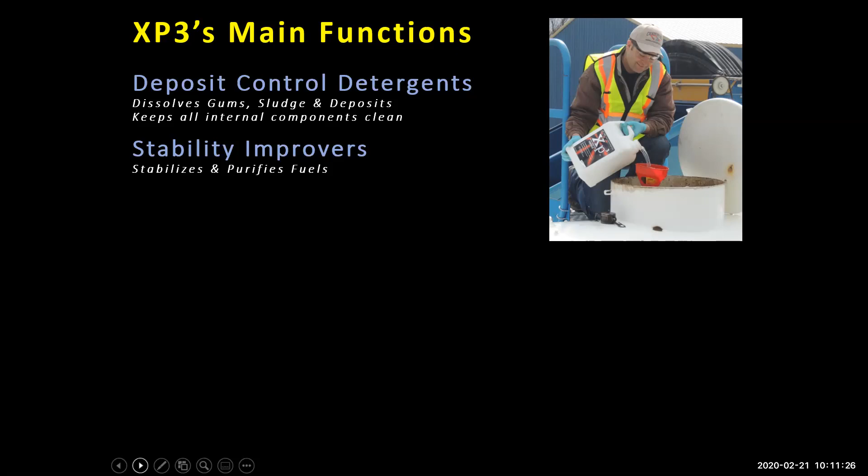So the main functions of what XP3 does: it's got deposit control detergents that help keep the internal components of your engine clean, as it was intended when it came out brand new from the manufacturer. It has stability improvers, which stabilize and purify fuels. Combustion improvers, so a more complete burn of the fuel equals more power and less unburned hydrocarbons, less emissions. It's got lubricity improvers, which lubricate and protect the entire fuel system.

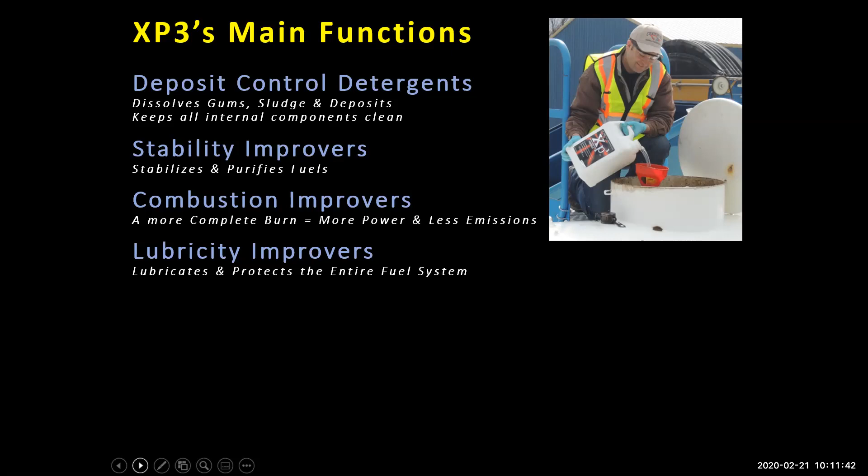It's got anti-gel cold flow improvers to maintain cold weather operability. Very important, especially in some Canadian winters that we get lots of weather.

Water dispersants - this is probably the most important feature of any additive. With the biofuel content today, the bio in diesel and the ethanol in gasoline, those compounds are hygroscopic, which means that when it comes out of the pump, yes, it might meet ASTM specification as spec fuel. But if you let it sit in a tank exposed to hot, cold, or humidity, the bio content in that fuel absorbs moisture and increases the parts per million of water in that fuel, which can then cause multiple other problems related to water, moisture, condensation, microbial infestation.

It's really bad. Water and fuel is something that fleets have to manage, and if they don't, they can come across problems that they don't want.

And again, if you're talking about fleets, everybody's looking for a positive ROI. This is a positive ROI product. For an input cost of 3 to 4 cents per liter to treat, you're gaining 4 to 8% better fuel economy right off the top from tank one, but you're also getting increased lubricity for your injector pumps, and all of the other functions that are not specifically directly related to a return on fuel economy, but very important in the operation of equipment in large fleets.

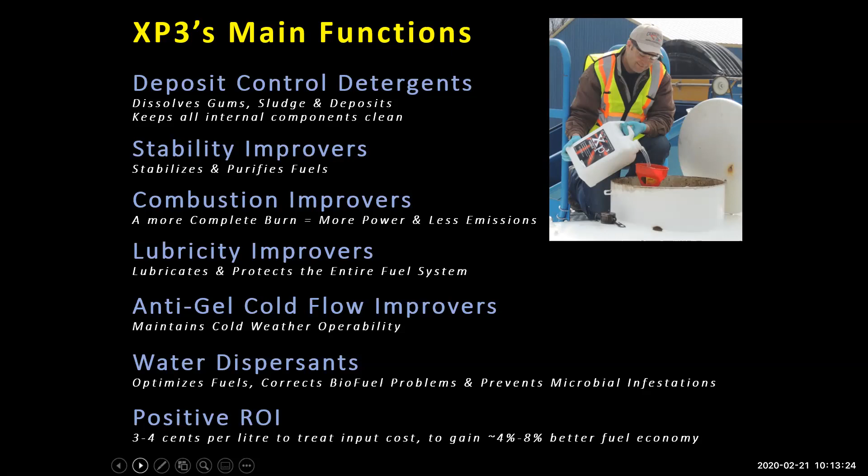XP Lab has been serving industrial, recreational, and commercial markets for over 30 years. Typically, what we've seen in Canada, the off-road heavy equipment, over-the-road, Class 7, Class 8 trucks, agriculture - those are the areas where we see the biggest volume and the biggest benefits.

But if you look at small engine power sports on the gas side, we've kind of gotten a cult-like following with the snowmobile, ATV, motorcycle, small engine.

And the person in charge of that association went to the extent of testing XP3 in a spectrometer to see if it shows up as a banned substance for racing, and it does not.

So if you know anybody in the racing world - motocross, snowcross, dirt track racing - if they want to get an advantage from a fuel standpoint, and it's not illegal to use, and it does not show up on a spectrometer, XP3 might be the ticket for them to get that extra edge.

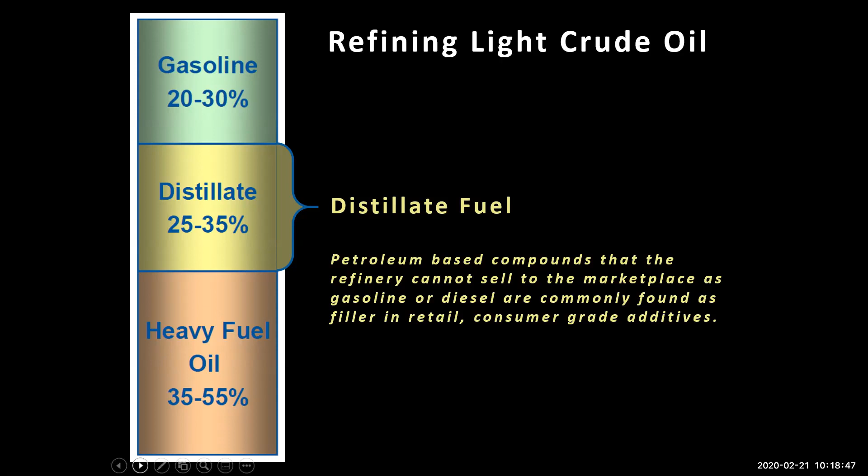But mainly what happens with retail grade additives is that they use that middle distillate as filler, which is not what you'd want because it's not meant to be burnt as gasoline or diesel, but it'll still kind of burn. So it's very important for consumers to check the MSD sheet. If the majority of the compounds are a filler or a petroleum distillate, then they know they're dealing with a consumer grade product, not an industrial strength, purely concentrated product.

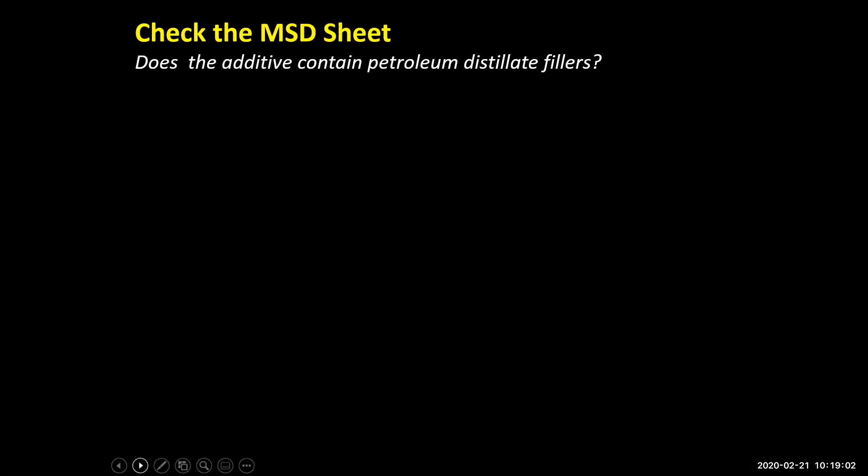So there are 6 different ways to help determine what an additive can actually do, no matter what it is. The first one you want to check is the MSD sheet - does it contain a petroleum distillate filler?

Here's the MSD sheet from a product called Howes. The first and third ingredients are petroleum distillates. The active ingredients in that product are ingredient number 2 and 4, and that's how they're able to get some anti-gel properties out of those extra ingredients. But if they were to sell a purely concentrated, industrial version of their product, that massive jug you see at the truck stops would actually be a little vial - 40 to 70% filler and only 1 to 5% active ingredients.

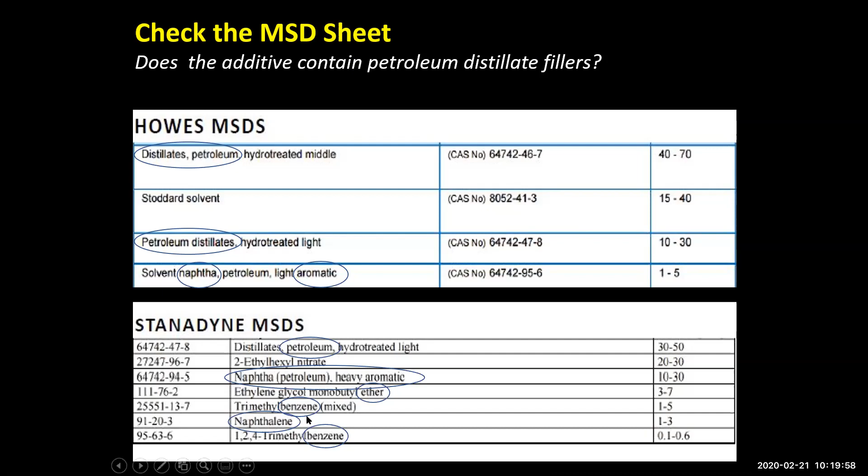Same thing here with Stanadyne, another retail grade additive. The majority of the first ingredient is petroleum, then the third ingredient is petroleum as well, plus other fillers. They also have ether in that product, as you can see on the 4th line.

Any questions, Trevor, on this so far? No, okay, we're doing good. Okay, I'll keep rolling here.

The second test is a test for carbon detergency value. You want an additive that has the ability to break down carbon, soot, and deposits in your engine. What you see here in the image is the bottom view of a pop can. On the bottom of the pop can there is carbon-based ink. If an additive has a high detergency value, it will break down the ink; if it doesn't, it won't. Very simple test to do.

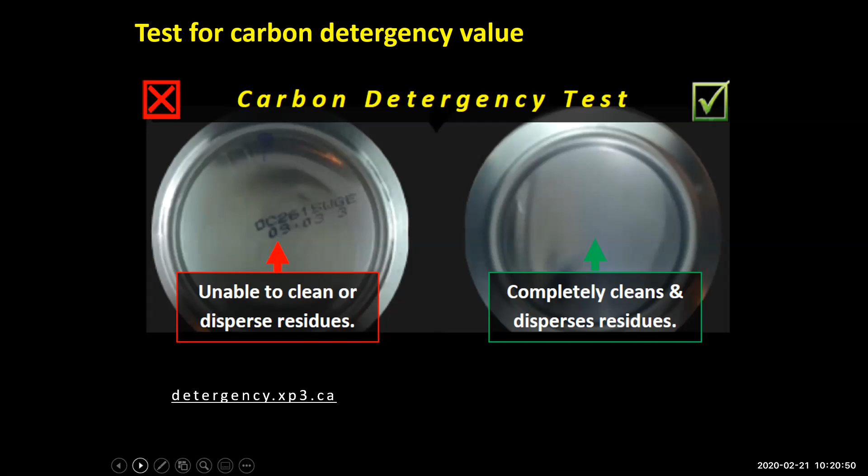The next test is combustion efficiency and particulate matter. From the same can, you take a torch and light the additive on fire. If it has a high combustion value, it'll burn clean and stable. If not, it'll burn darker, unstable, and dirty. Some of the worst retail grade additives will actually emit particulate matter, which is a major problem for tier 4 emission controlled engines with diesel particulate filters and DEF fluid. If you're adding something to your fuel that makes it burn worse, that's going to have a negative impact on your post-combustion stream emission equipment.

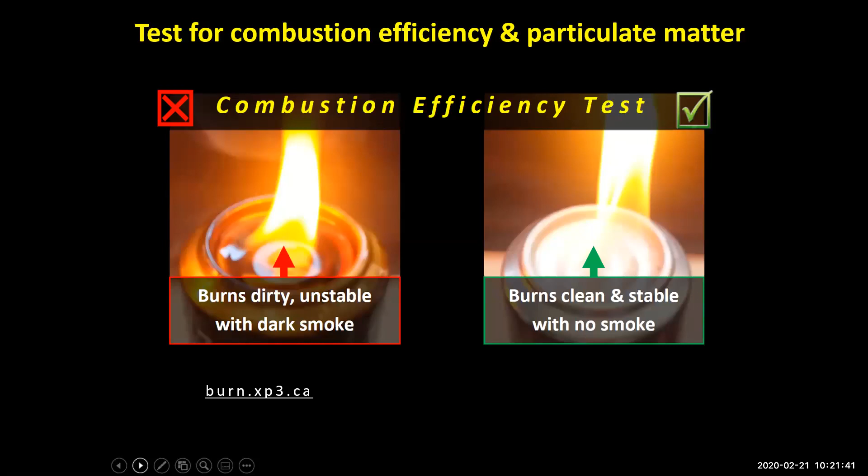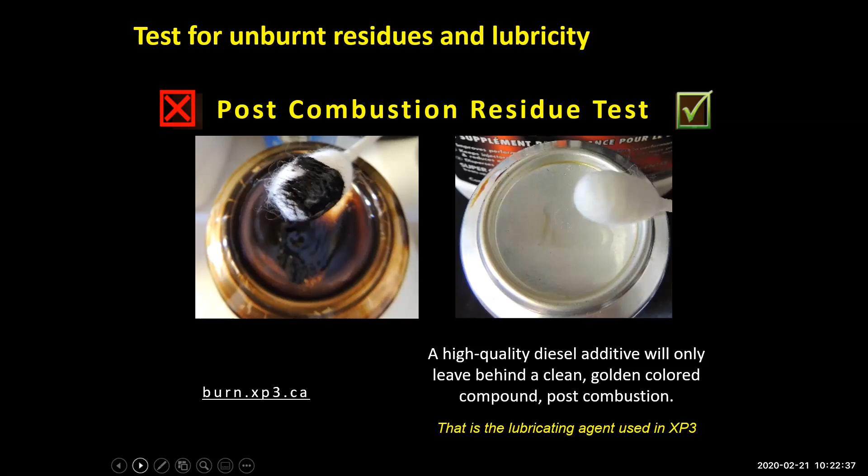Here's another test that's probably the most critical one. How does the additive behave with water and moisture? You simply put the additive - you don't need test tubes to do this. You can do it in a clear cup, or even those little clear shooter cups from the dollar store. Put a couple of drops of water in the additive you're validating or testing. If the additive has the ability to control water and moisture, you'll be able to see it break down. If it doesn't, it won't.

The second thing to know in this test is if the additive is able to break it down, you want to double check the MSDS sheet to make sure the product does not contain any alcohol. Alcohol would give the appearance of doing something with water, but because alcohol is volatile, as it evaporates, the function it gave initially will be removed, and then the water will fall back down at the bottom of the tank out of suspension.

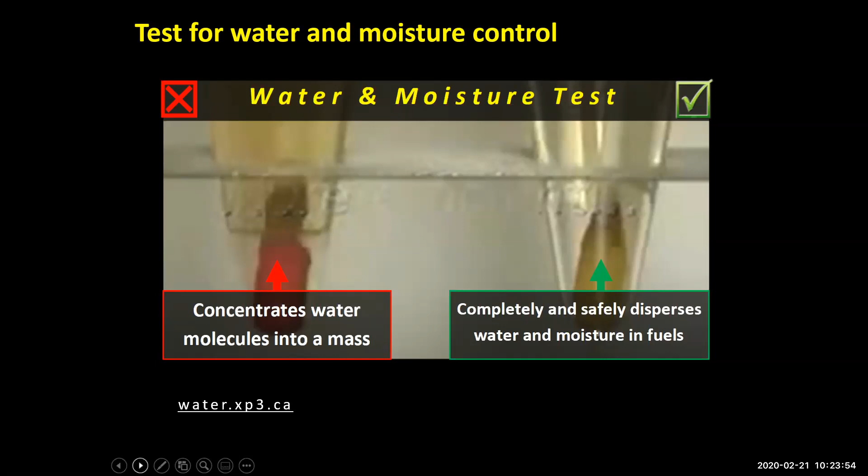This test needs to be done in a laboratory environment because it requires hydrochloric acid. It's a test to see how well an additive can stabilize fuel - literally an acid test on the ability to restore broken down and degraded fuel. You need glass test tubes. Fill it half with diesel, and put in 2 drops of hydrochloric acid. The hydrochloric acid will simulate the breaking down, phase separation of the fuel, and then you add the additive into the test tube. If the additive has a high stabilizing factor, it will be able to restore and regenerate the fuel back to spec.

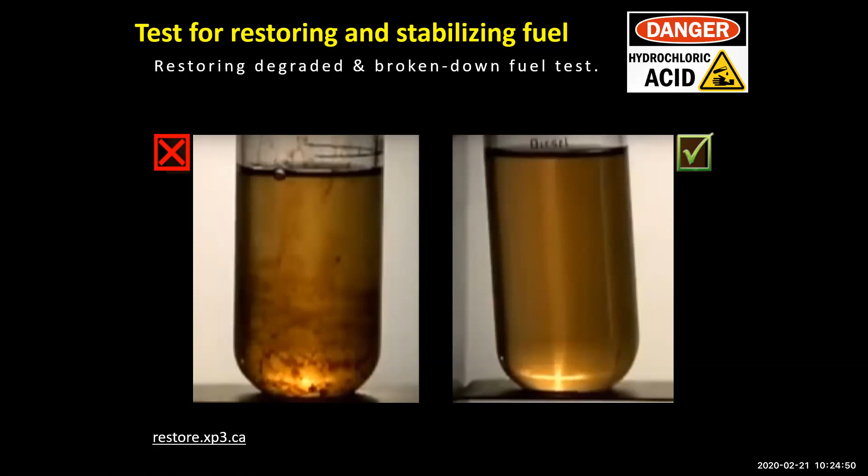And here's a big one. Dyno testing an additive will show you if an additive can get you better fuel economy, and hand in hand with a dyno test is an emissions test. So you're either able to burn the fuel more as energy or not. If you do, it will show up as more torque on a dyno and will show up as less unburnt hydrocarbons in the post-combustion stream of that engine.

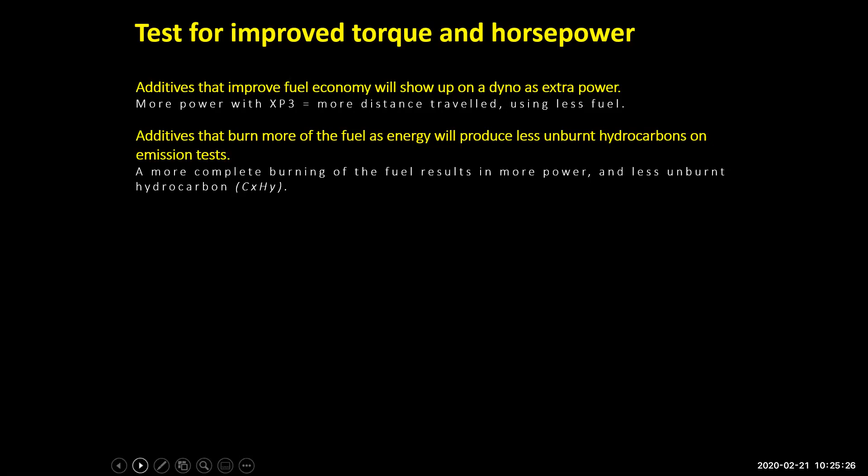This was actually done by Clearview Co-op in Steinbach, Manitoba - an independent test. They took a 6.6 Duramax diesel truck. The baseline torque on the dyno was 834 foot-pounds of torque. A single dose of XP3 regular added 11 foot-pounds of torque, and a double dose of the XP3 regular added 16 foot-pounds of torque.

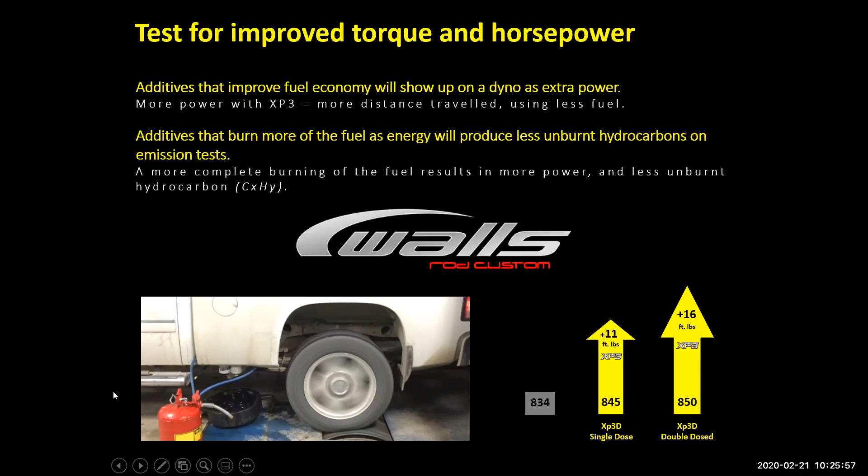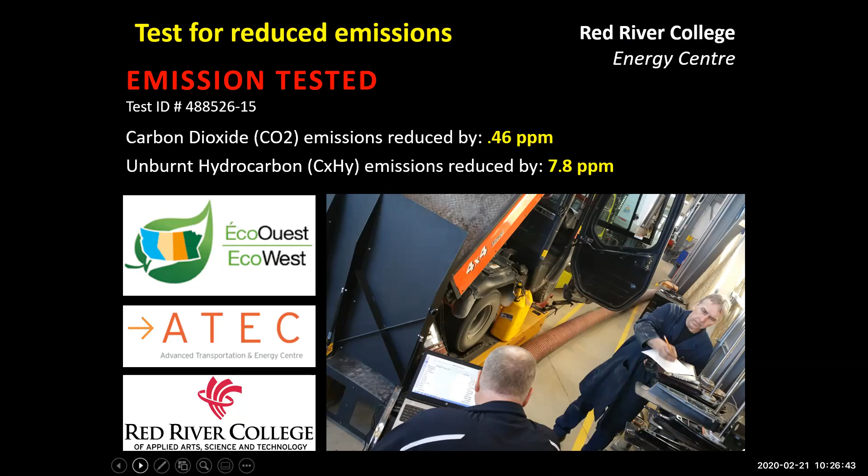On the back side, this test was done at the Advanced Transportation and Energy Center for Red River College. They were able to determine in a 2-minute test on a small diesel Kubota engine the reduction of carbon dioxide and the reduction of unburnt hydrocarbons. We got validation from EcoWest, which was working with us on this project, that XP3 does reduce carbon emissions. So for fleets or operations that have an environment-friendly mandate or mission statement, this is one of the technologies they can incorporate to check that box on active measures they're taking to be more environment-friendly.

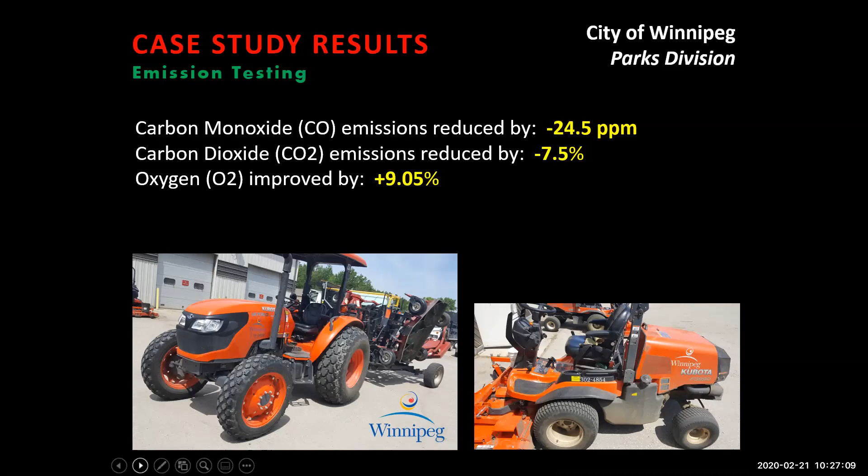We also did emission testing on 9 pieces of equipment at the City of Winnipeg's Parks Division, and it showed a reduction in CO, CO2, and an improvement in oxygen averaged over all of that equipment. This was a test done over, I believe, a 2-month span, tested on smaller diesel engines. Again, we got the stamp of validation as a clean tech, eco-friendly, validated technology that helps reduce emissions and improve fuel economy from EcoWest, which is a government-funded consulting firm that works with municipalities and government on ways to be more efficient, from lighting to garbage disposal. They cover the whole gamut.

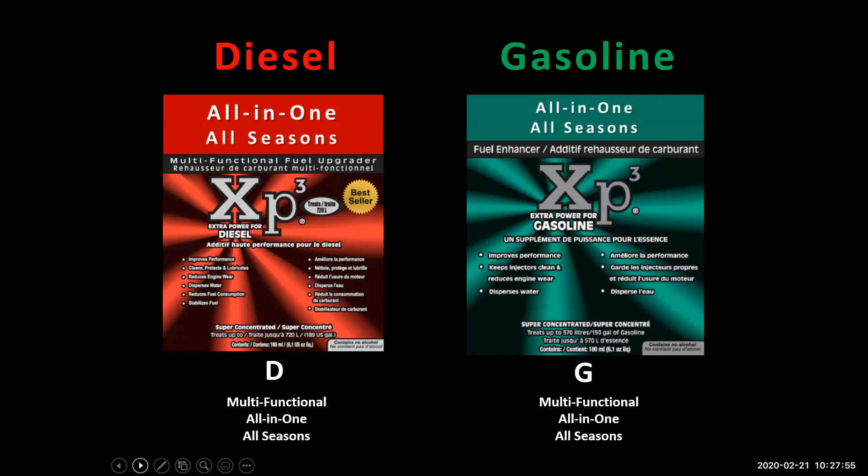We have one main diesel product and one main gasoline product. The XP3 diesel is our best seller, but we also have two specialty blends for diesel. One of them is the all-in-one cetane boost, which is the same product as the XP3 all-in-one, except it has a cetane booster component added to it.

This is recommended for equipment running under continuous heavy load or restoring cetane levels in seasonal diesel fuels. The second specialty blend for diesel is our all-in-one extreme winter. This converts summer fuel to winter fuel, or if you're already starting with winter fuel, it will convert it to Arctic grade polar diesel. The use for that is mission critical applications, emergency response vehicles, ice road truckers, or truckers that are going into the US, filling up with US fuel and coming up to Canada. They will need an extreme amount of anti-gel.

The question we always get is, well, I'm running Canadian diesel fuel because I'm going from east to west. Do I need the extreme all-in-one extreme version of XP3? The answer to that is no. The XP3 regular gives you enough protection that you don't need to go to the extent of an extreme protection product like the diesel extreme winter.

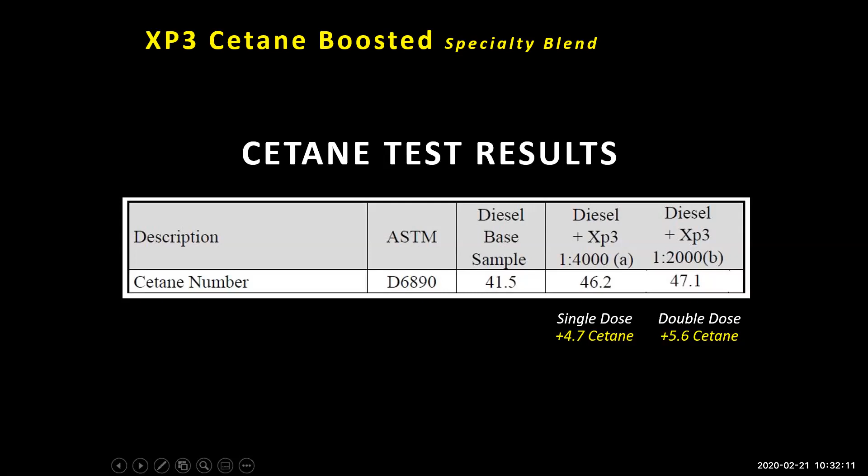Here's something a lot of people don't realize. North America has one of the lowest standards for diesel when it comes to cetane. In North America, to be considered spec fuel, the cetane is 40. The only exception to that is California, which is interesting because California has always been a leader in emission-related initiatives, and it's not a fluke that they mandate 53 cetane in diesel, because the higher the cetane, the better that engine will perform and the less emissions.

Europe is 51. This year it's going to be going up to 55. And in Finland, their minimum is 60, but you can even get 70 for premium diesel. So I just share this with customers for them to realize that our standard for cetane in diesel fuel in North America is very low compared to other parts of the world.

Another thing is, let's say you take a Volkswagen Jetta diesel, and they do the fuel test in Europe and they're getting 65 miles per gallon. Then they bring that same car to North America, US or Canada, doesn't matter, and instead of 65, you're getting 50 miles per gallon. It's the same car, same everything. What's the difference? Well, our fuel quality in North America is lower than Europe.

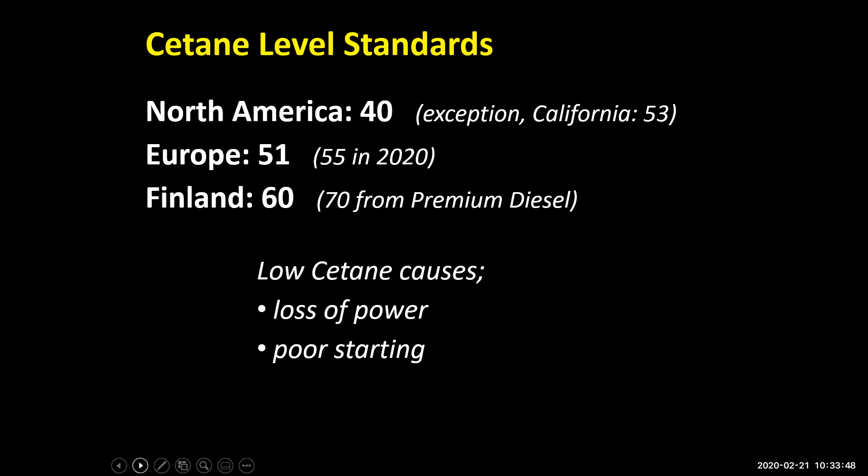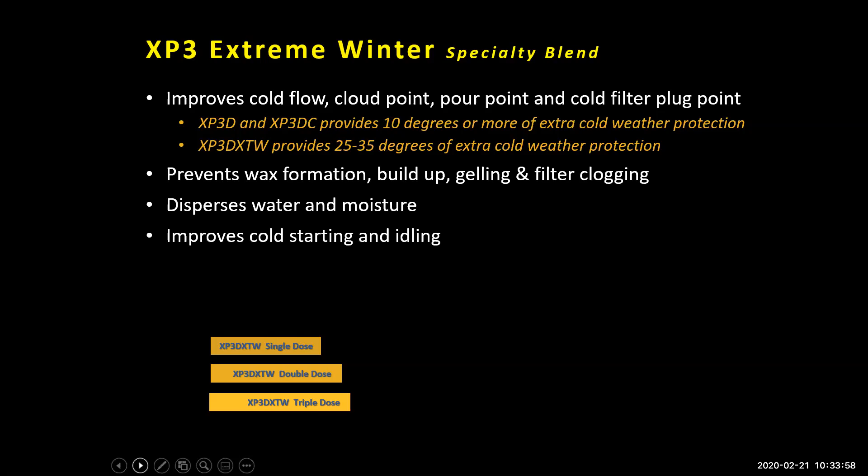This is a chart from a test we did with the extreme winter formula, done in a laboratory. The base fuel was rated at -27. A single dose of XP3 Extreme Winter gave 24 degrees of extra cold weather protection.

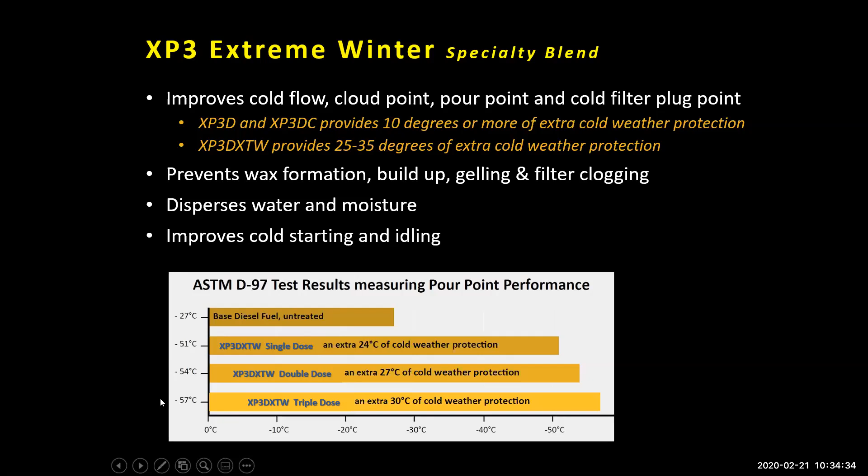When we double and triple dosed the test, we saw incremental gains. So if you're running a mission critical diesel powered unit, like an ambulance, a fire truck, an ice road trucker that never wants to go down, or a diesel standby generator in a remote community, you might want to use XP3 Extreme Winter. But XP3 Regular does give you sufficient protection against gelling, and that's what we recommend in North America.

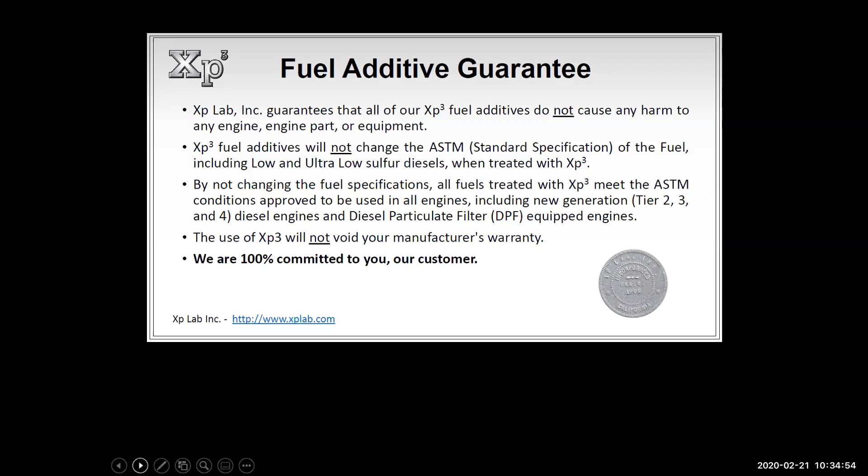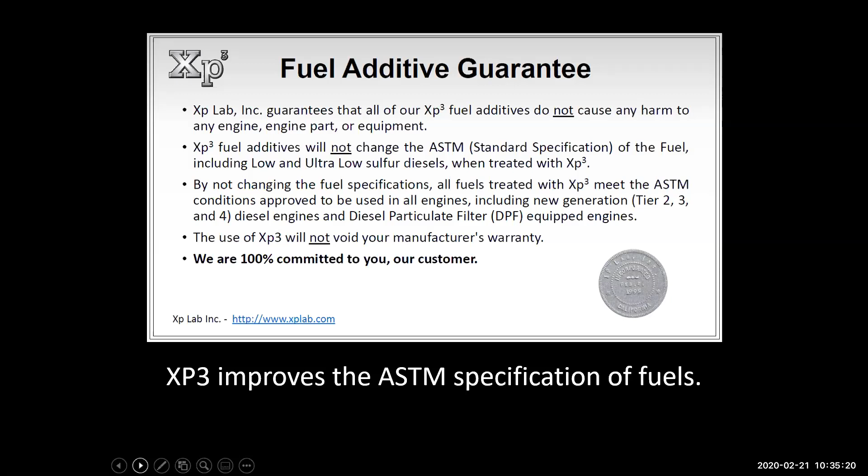A lot of fleets want to know in writing that whatever they're using will not affect their warranty. XP3 is 100% warranty safe and warranty compliant. It will not void your warranty, and the main reason is because it actually improves the ASTM specification of the fuel rather than degrading it. In the last 30 years, there's never even been an attempted claim of any damage by any company using the XP3 product. A lot of people want to see this in writing, and the manufacturer does provide that.

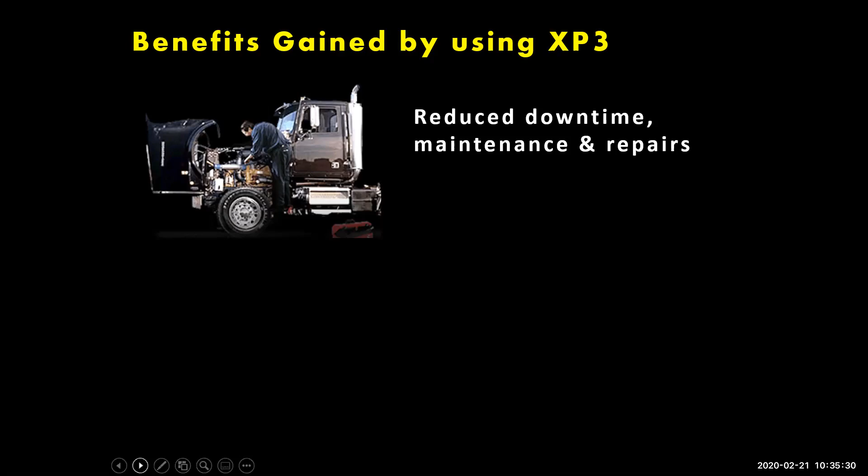So just an overview of the benefits you gain with XP3: reduced downtime, reduced maintenance, reduced repairs. If you have a Tier 4 equipped diesel engine, it will reduce your regen cycles. They won't last as long, and the intervals between them will be longer.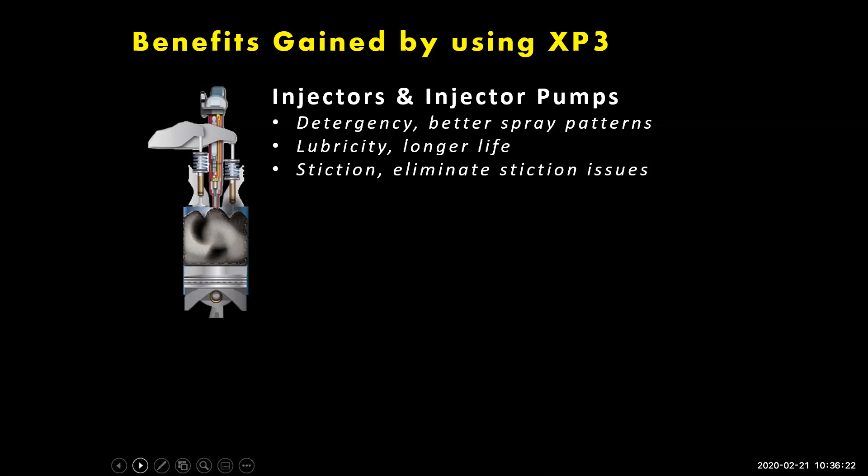It also provides lubricity for injectors and injector pumps. Everybody knows that the right kind of lubricity in your diesel will make your injectors and injector pump last longer. Very important. And cold weather operability, which we already spoke about.

If you have any diesel stored in bulk tanks, slip tanks, yard tanks, or during transportation, those are the harshest environments diesel is exposed to. Heavy sediment goes to the bottom of the tank and creates sludge, then there's a layer of water, and then a layer of microbes living in there. By stabilizing the fuel and fully dispersing the water instead of letting it settle at the bottom of the tank, you prevent the conditions that cause massive problems in storage tanks, transportation tanks, and so on.

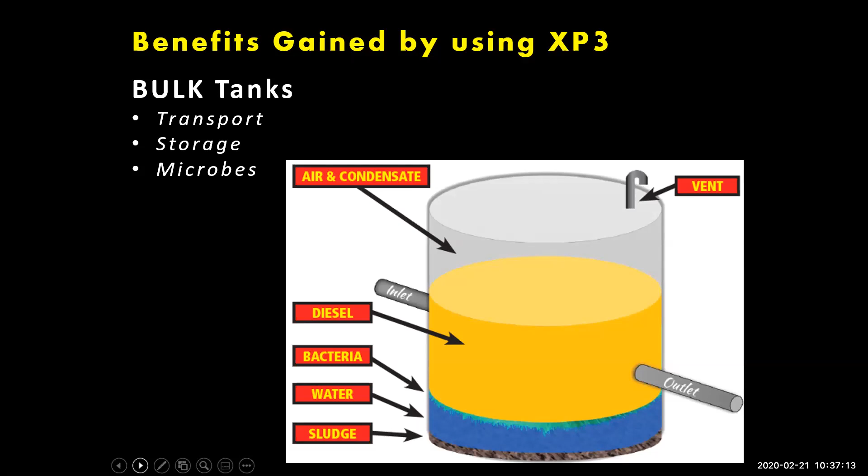I'm going to take you off mute. Trevor, how's it going? Good. Any questions? We're just going to do a recap, and then we can go into an open Q&A. Yeah, no, I think we're doing good. Okay, awesome.

Okay, so just a quick recap. XP3 stands for extra power, extra performance, extra protection. On the power side, it increases your torque and horsepower, boosts fuel economy, and reduces pollution because you're burning the fuel more as energy and less of it as waste. It's also easier on your Tier 4 emission control post-combustion equipment.

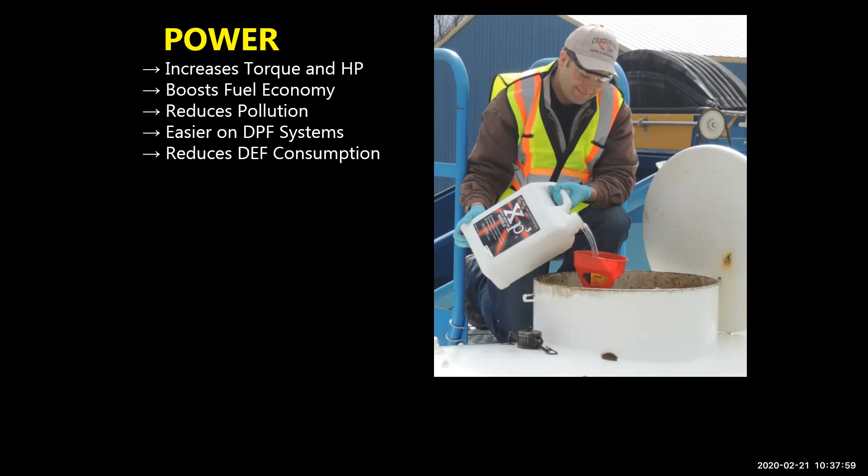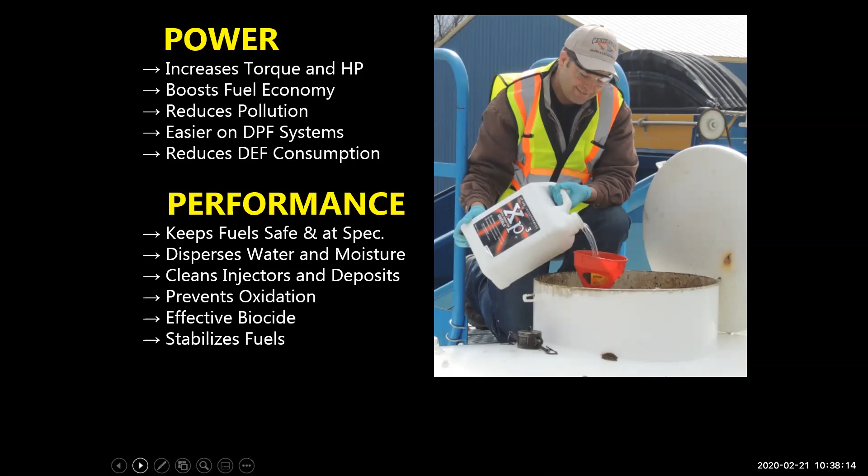On performance, it keeps fuel safe and at spec, disperses water and moisture, keeps your injectors clean and removes carbon, soot, and deposits. It also prevents oxidation of the fuel, acts as an effective biocide, and is a good stabilizer. It also protects on the engine oil side of things.

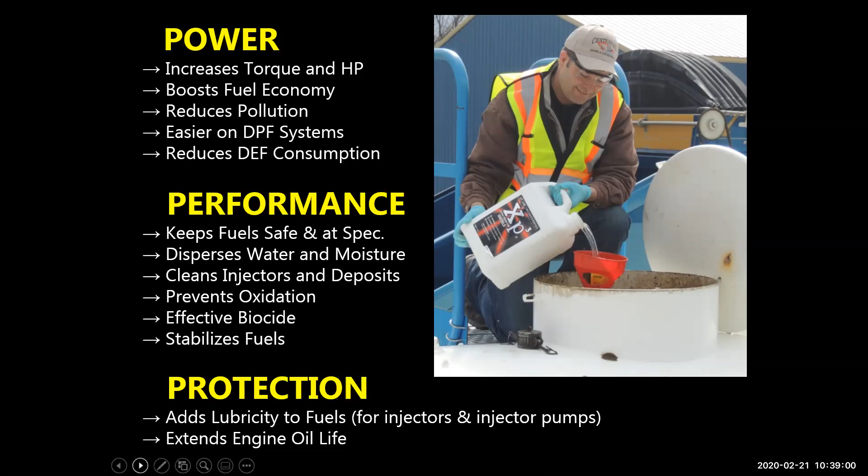A more complete burning fuel means less heavy metals seep through the cylinder walls and end up in your oil, which would otherwise exacerbate the breakdown of the oil. Fleets that use oil sample analysis to trigger their oil changes have seen an increase of up to 25% longer oil life in the bottom end of their engine. So even though XP3 is a fuel-related product, fleets will see a positive benefit on the bottom end with their oil lasting longer, because of more complete burning of the fuel and less heavy metals seeping down through the cylinder walls.

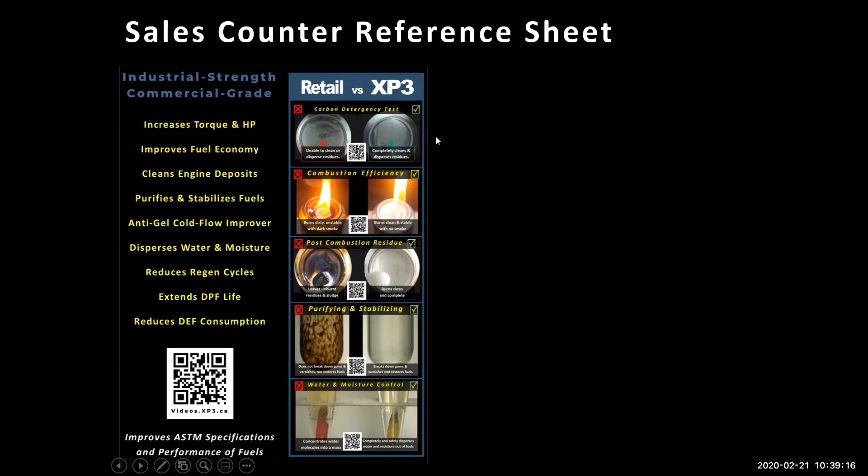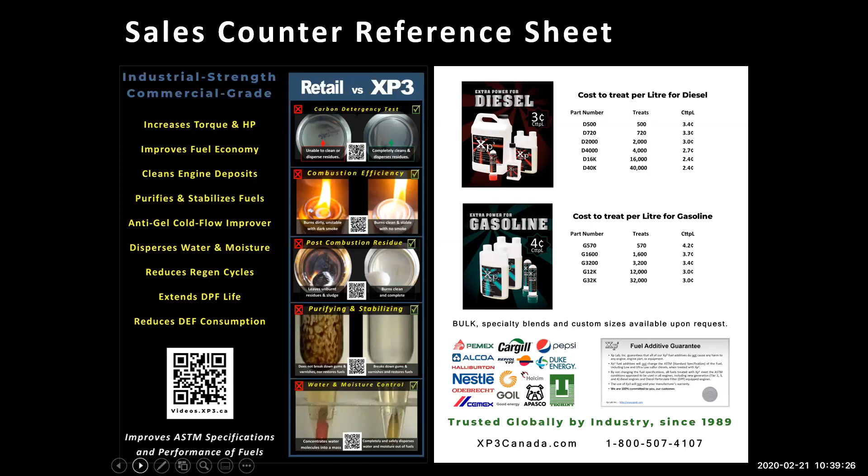We have a sales counter reference sheet that walks people through the different tests to do. The QR codes on it will trigger a video for each test, whatever the fleet or customer is interested in. On the back side of that sheet, you'll find some of the most common part numbers, along with the cost to treat per liter that you can reference as well.

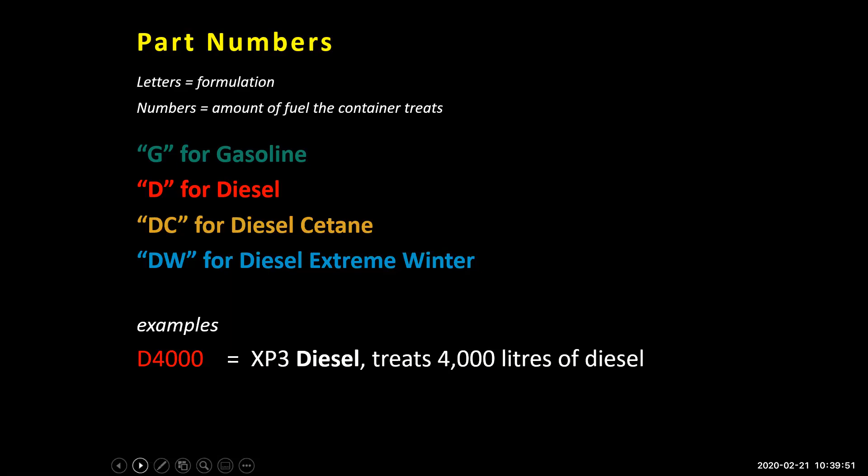Our part numbering is very simple. The first letter is what the product is, and the numbers are how much fuel that container will treat. So G is for gasoline, D is for diesel, DC is diesel cetane, and DW is for diesel extreme winter. For example, the D4000 part number is the XP3 diesel that treats 4,000 liters.

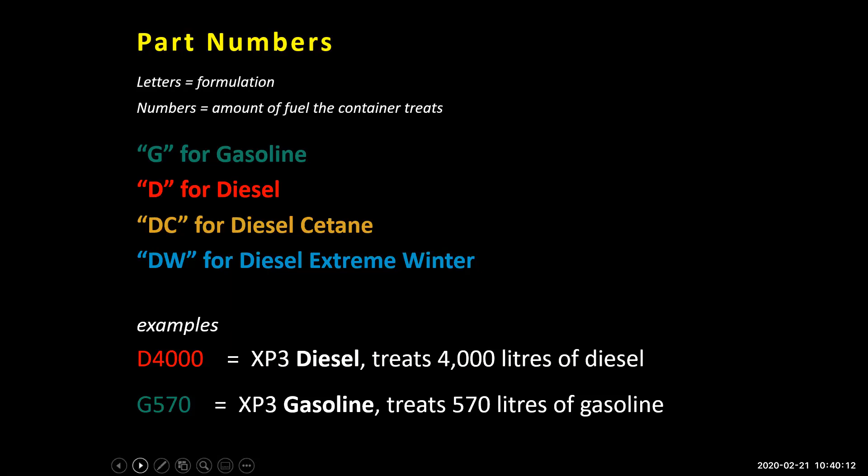The G570 bottle is the gasoline XP3 that treats 570 liters. So when a customer is looking for a specific product and they say, give me a case of D4000, everybody knows what they're talking about. You don't have to cross-reference a cryptic part number.

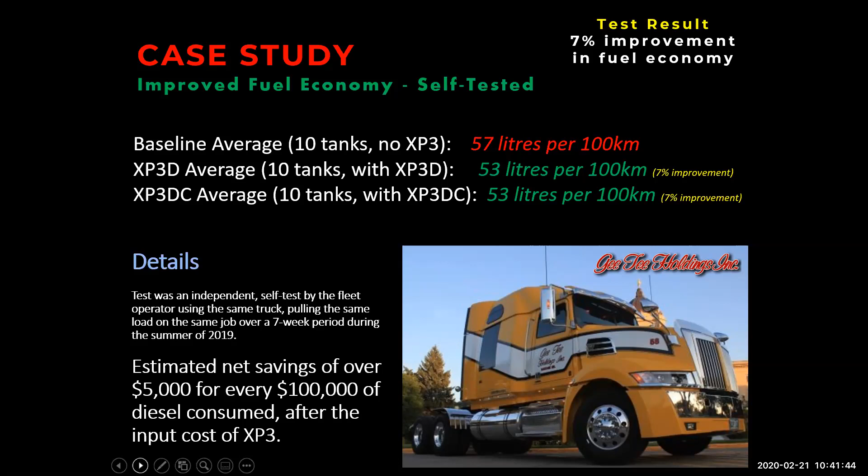So what does that mean? This was over a 7-week period. What that means is for every $100,000 of diesel consumed, they're saving approximately $5,000 after the input costs of XP3. So again, positive ROI right from tank one, and anything over and above that, like the added lubricity, the protection against gelling, the protection against water and moisture, all of that extra stuff is basically bonus.

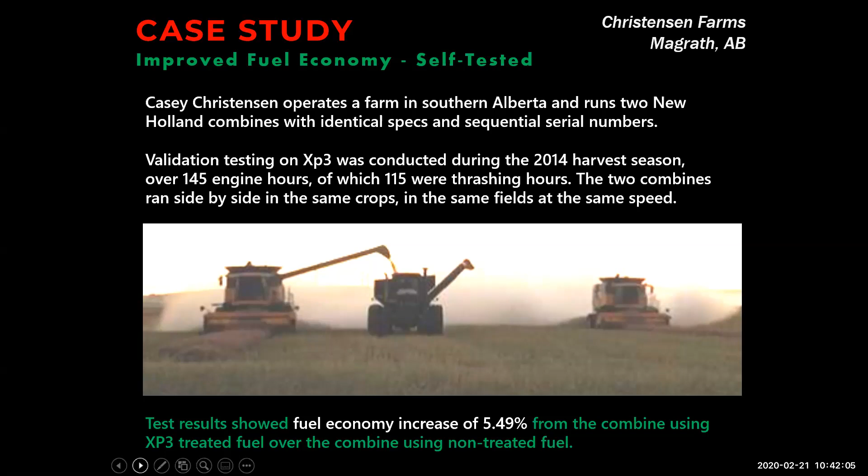Here's another fuel test: 2 New Holland combines running the same fields at the same speed. One was using XP3, the other one was not. The machine using XP3 consumed 5.49% less fuel than the non-treated combine.

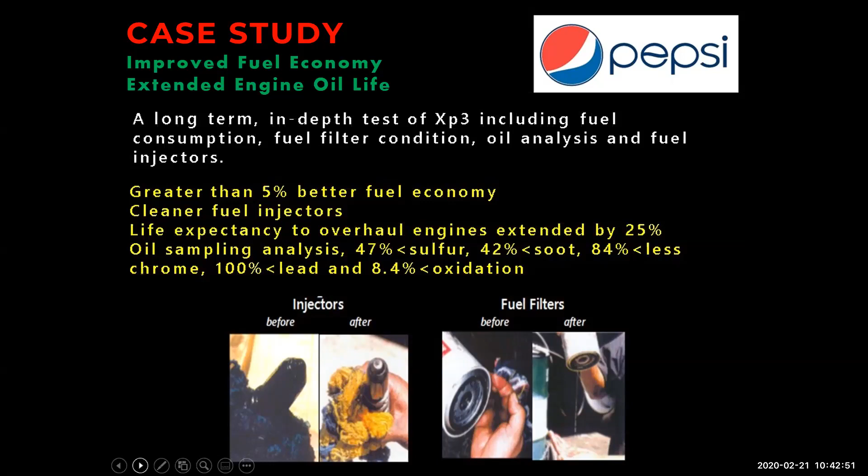And they also did a fuel injector test. Before the test, they pulled out the injectors and documented the way that they looked. They ran 5,000 kilometers of XP3 treated fuel, and when they pulled the injectors out, they were clean, like you see in that picture for before and after.

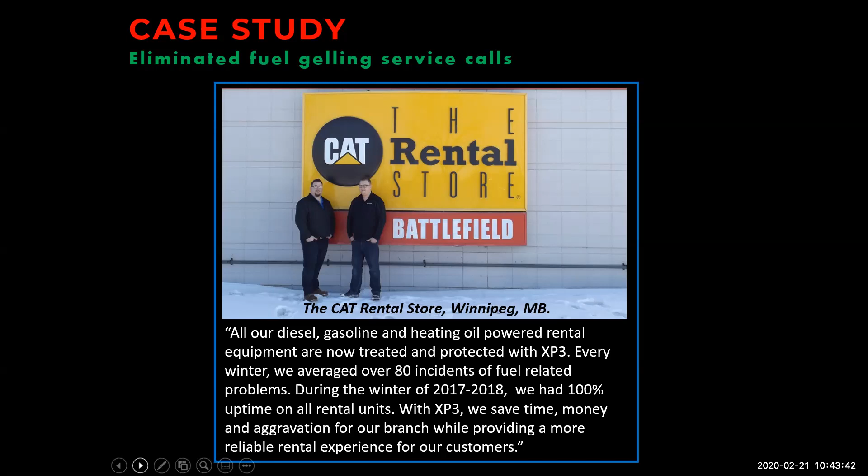So the bottom line in all of this: the informed user of fuel additives is always going to choose an industrial strength commercial grade product over a retail consumer grade product. The key in this sentence is informed. You as a rep or salesperson need to take an educational based approach to this product, because it is an industrial product, and the people that don't know what they don't know - that's our job, to educate and inform them, and compare with what they might have used in the past, so they know the product they're using is doing what it's intended to do. And if it's not, we can give them options to look at stuff that will.